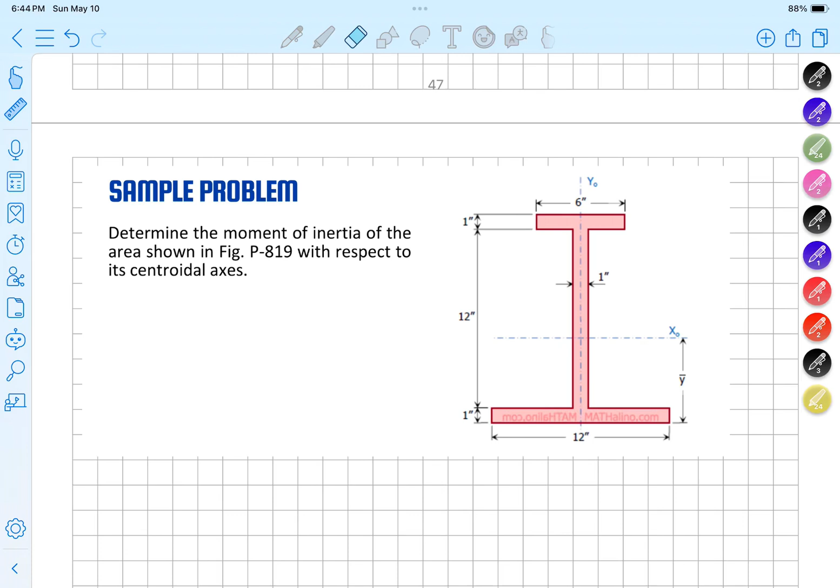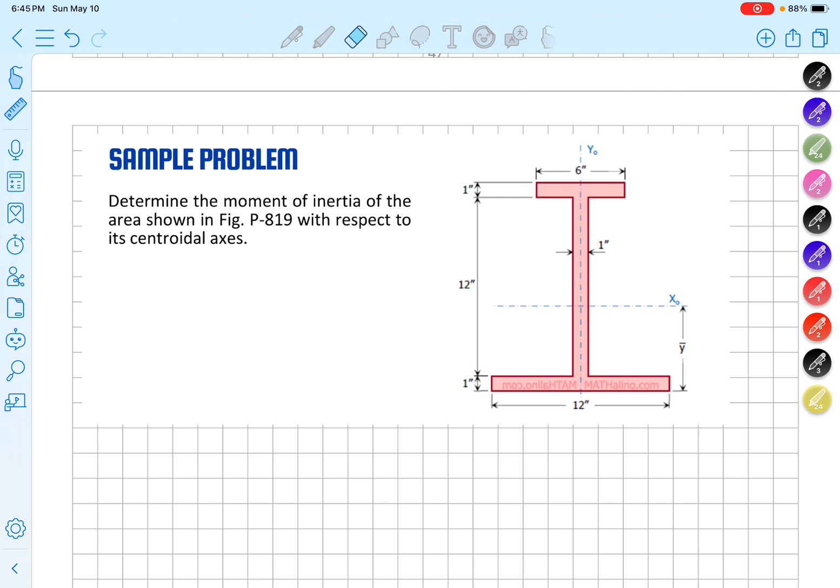Okay guys, nagbabalik tayo for sample problem number 2 under the moment of inertia. Determine the moment of inertia of the area shown in the figure with respect to the centroidal axis.

Okay guys, so in this case, wala tayong binigay na reference axis para ma-identify natin yung location ng centroid. So technically, pwede tayong mag-assume dyan. Lagay na lang natin dito sa gilid, at dito sa pinakababa, yung ating x and y axis. Pagpalagay natin na nandyan.

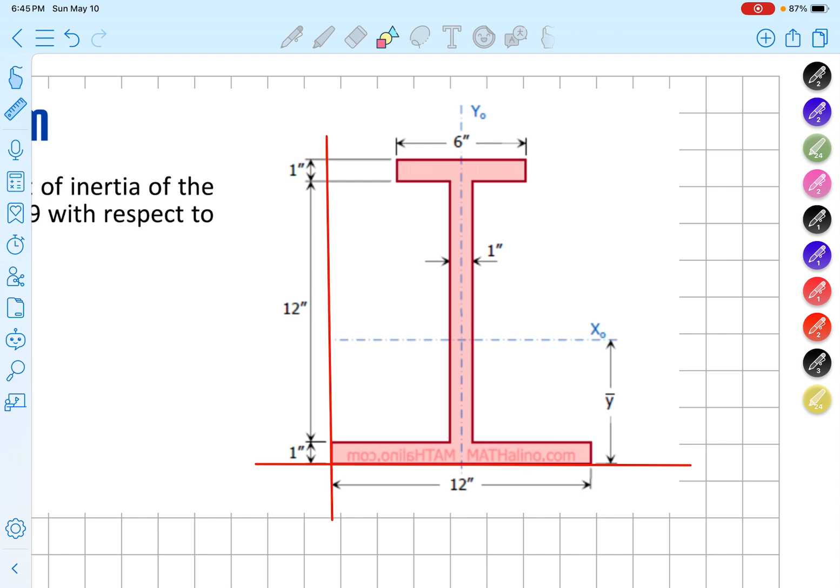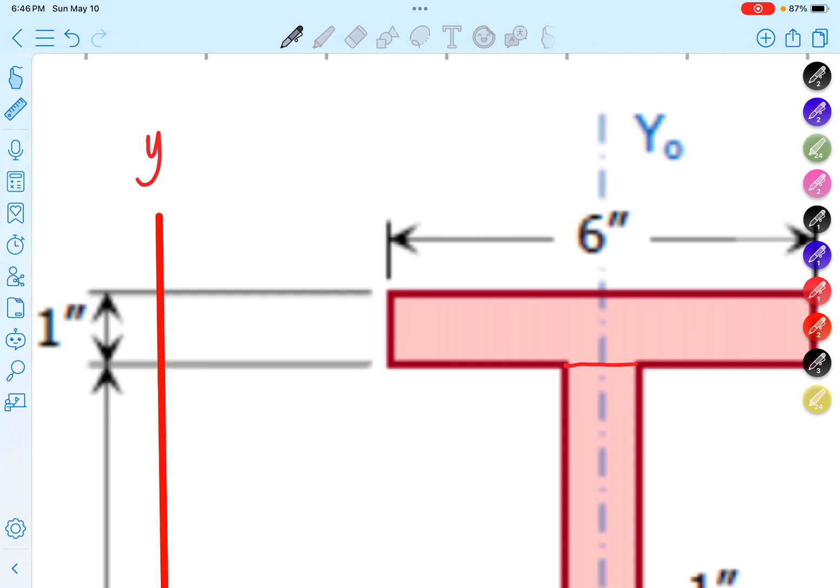Okay, so technically pwede nating hatiin yung area natin into 3. Pwede nating hatiin ito diyan, tapos hatiin natin ito. So bali tatlo lang yung area natin ngayon. By the way, this is our reference y, this is our reference x. So therefore we have shape 1, shape 2, at shape 3. Pangalanan natin sila as shape 1, shape 2, at shape 3.

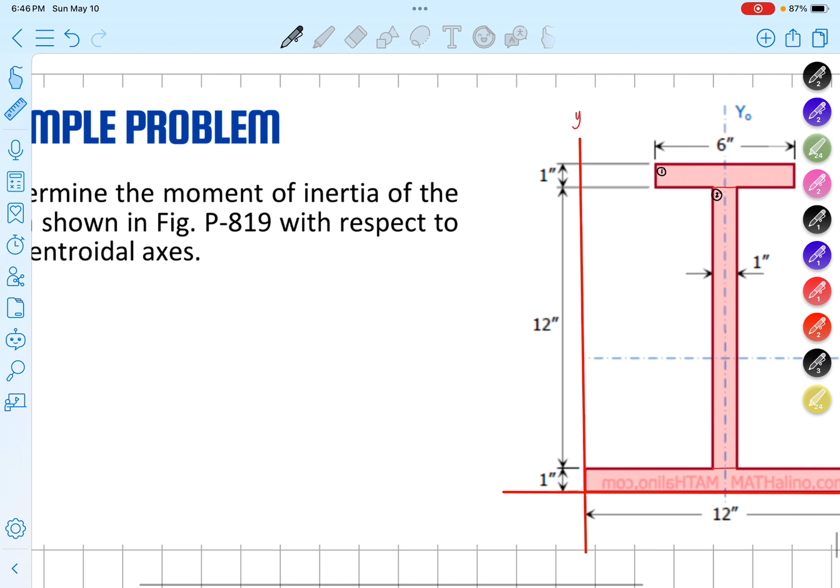Okay, so kunin lang natin ngayon yung area. Medyo madali lang ito kasi puro rectangular cross section. For area 1, ang area na kukunin natin is yung area na yan, which is 6 times 1, or 6 na lang.

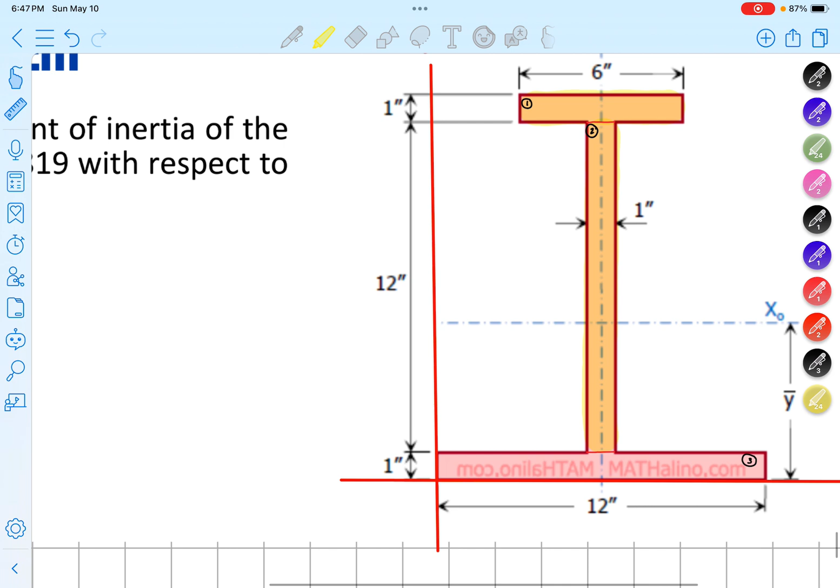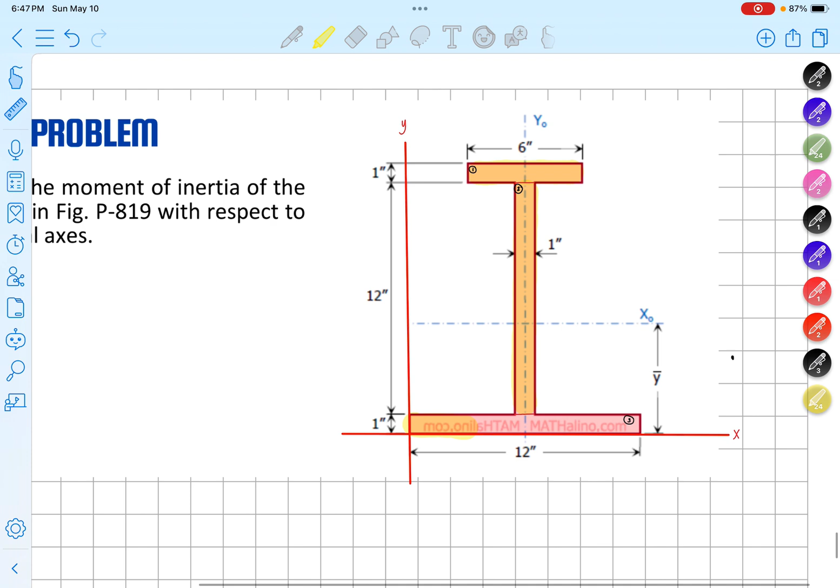Okay, now for area 2, yung length dito is 12, at may thickness na 1. So technically that's 12 times 1, so 12 na lang. At then for the last one, ito naman ay may area na kukumputin din natin - that's also 12 times 1, so 12 lang din. Okay, ang next na kailangan natin gawin is to determine ang xi muna.

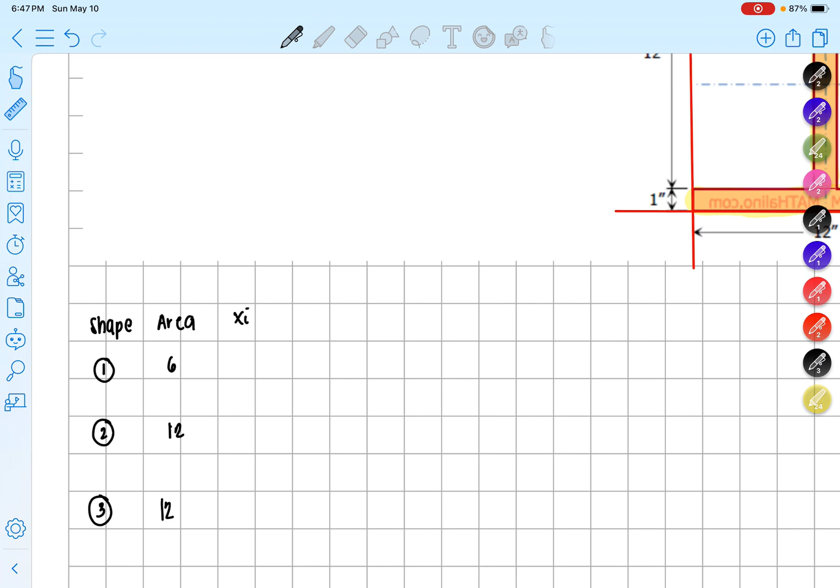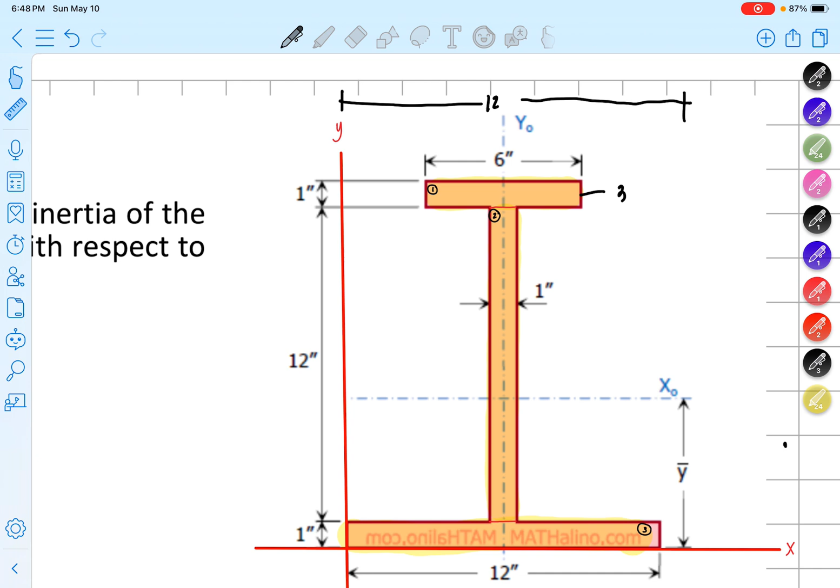Sige, sa xi muna tayo. Xi, positive kapag nasa kanan ng y, negative kapag nasa kaliwa ng y. Kung meron tayong 6 dito sa gitna at 12 itong buo na to, tapatan natin yan, magkakaroon ka ng 3 dito, tapos 3 din dito, kasi 3 plus 6 is 9 plus 3 equal to 12. Ibig sabihin malolocate na natin yung distance neto from the y-axis, which is 3 plus kalahati ng 6, so 3 plus 3 is equal to 6.

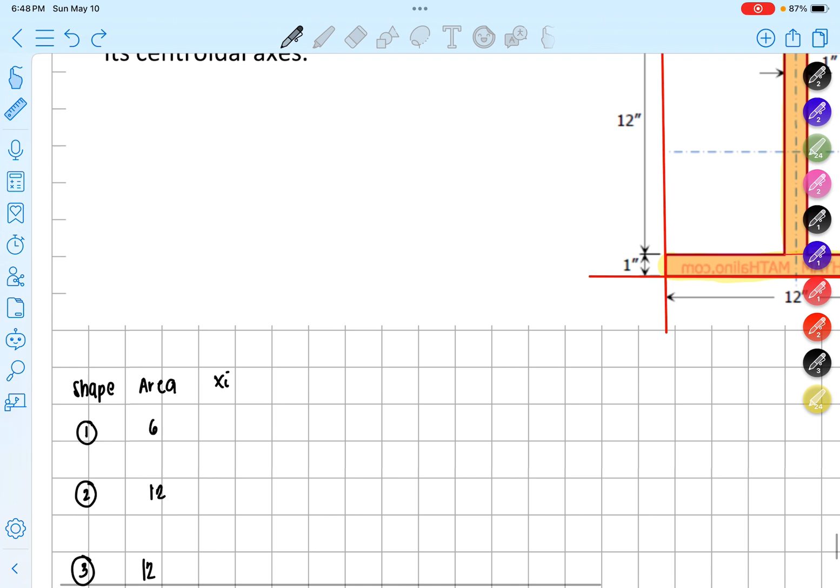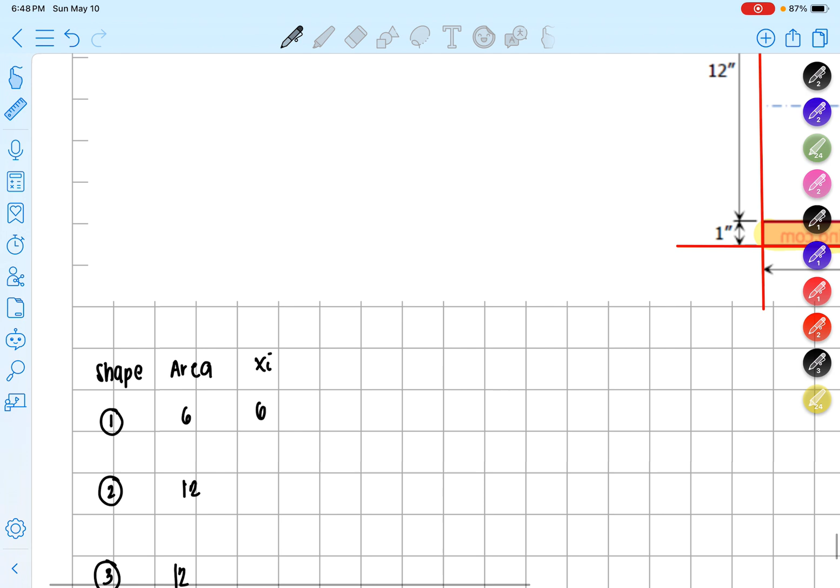Next for this one naman, eto sa gitna natin na yan, nasa 6 lang din siya from y. So technically this is also 6. Next yung 12, nasa gitna lang din to, yung 12 na may 12 the base, nandyan lang din sa gitna. So technically from y-axis, that's also 6.

Okay, so next we have AXI. Pag multiply lang natin, 6 times 6 equal to 36. 6 times 12 equal to 72, and dalawang 72. Mamaya natin i-total. Kunin muna natin si yi.

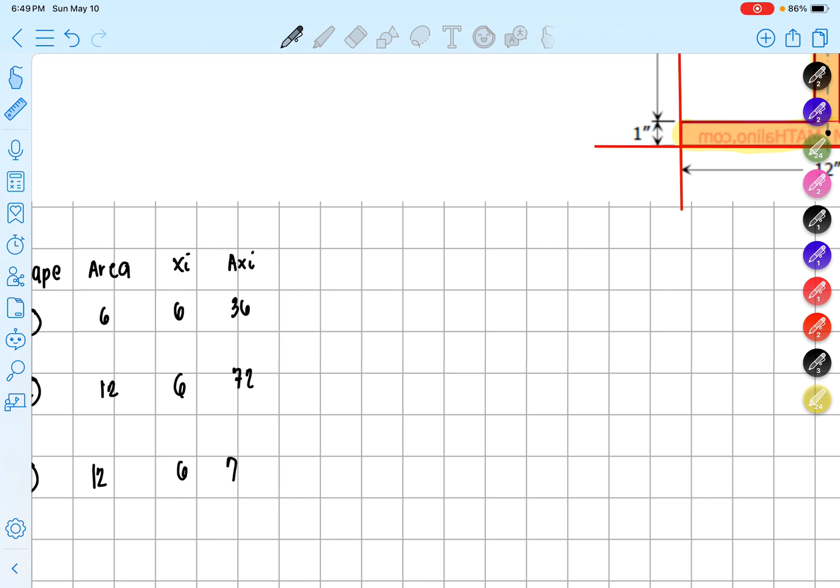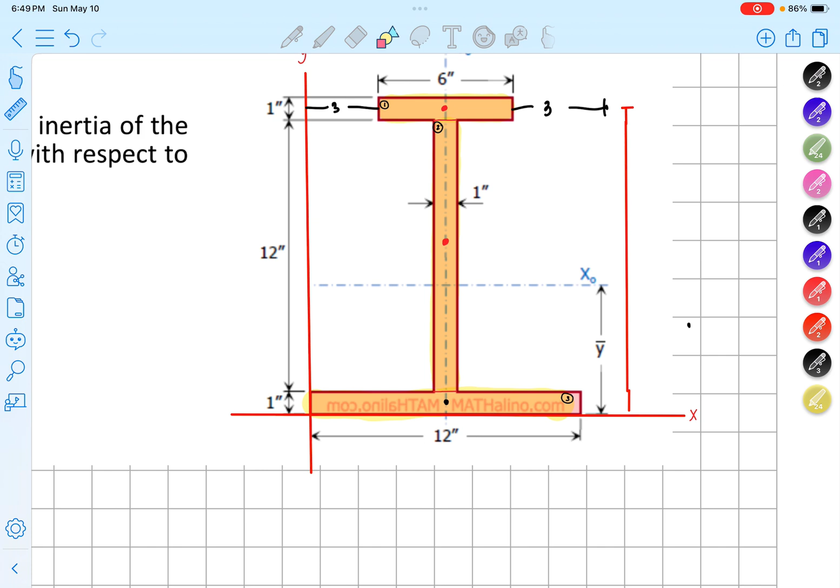Ngayon si yi, naka-reference tayo dito sa reference x-axis natin. Ibig sabihin, dyan tayo magsisimulang bumilang. Halimbawa, etong portion na to, bibilangan natin hanggang dito sa reference x natin - 1, tapos paplasan natin ng 12, tapos kalahati nito. So technically that's 1 plus 12 plus kalahati ng 1 para sa area 1. 1 plus 12 is 13, tapos kalahati ng 1, so this is 13.5 - yan yung vertical distance niya from the x-axis.

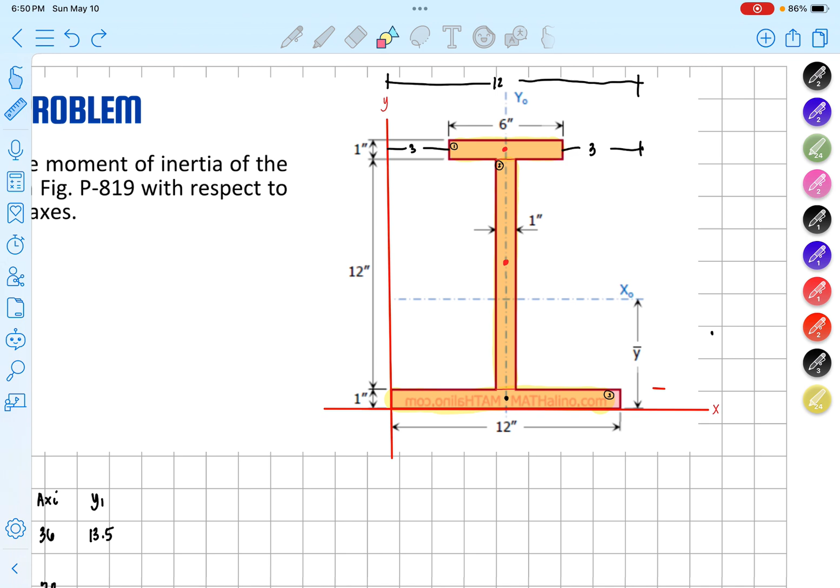Next naman, para sa area 2, kung mula dito hahanapin natin yan, that's 1 plus kalahati naman ng 12. Ibig sabihin, 1 ka muna dyan, tapos kalahati ka lang ng 12, so that's 1 plus 6 equal to 7. At then para sa last one, etong isa na to, kung mula dito lang yung kukumputin natin, hanggang dyan, kalahati lang ng 1 yan, so technically that's 0.5.

Okay, this is 0.5. Let's take AYI now. So 6 times 13.5 equals 81. Next, 12 times 7 equals 84. And 12 times 0.5 equals 6, of course.

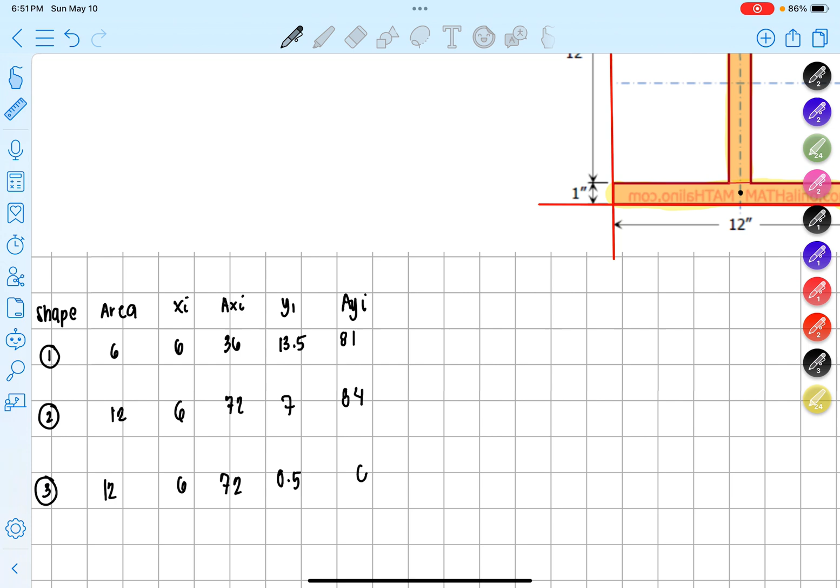Now let's get the total area. For the total area, we have 6 plus 12 plus 12, equal to 30. And for AXI, the sum is 36 plus 72 plus 72.

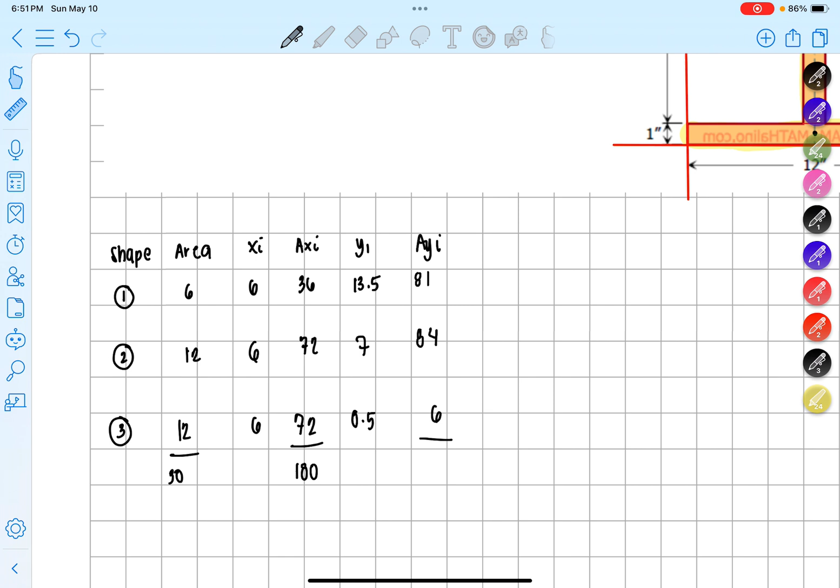This equals 180. And for AYI, we have 81 plus 84 plus 6, giving us 171. So in this case, is that correct? 30, right? Yes, 30.

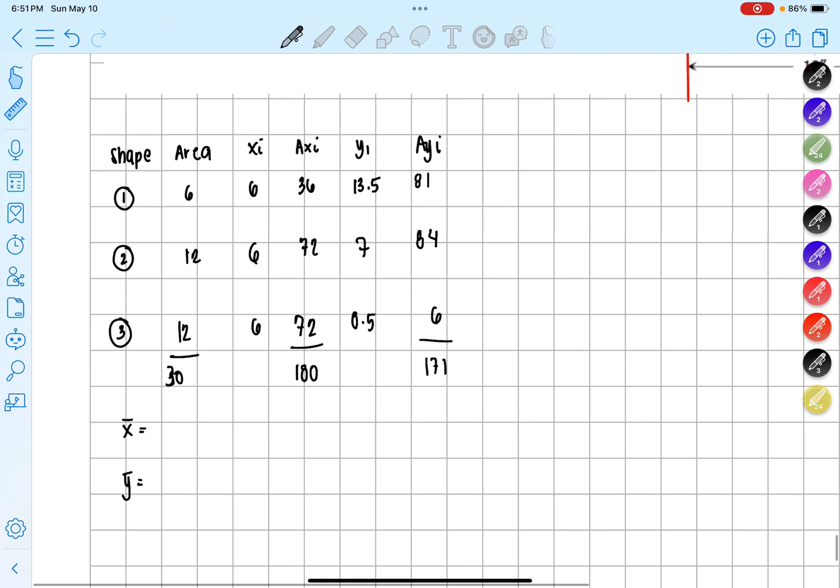So that means we can get X bar and Y bar. For X bar, this is simply equal to AXI over the total area. AYI over the total area gives us Y bar. So our X bar is simply equal to 180 over 30, which equals 180 divided by 30, equal to 6.

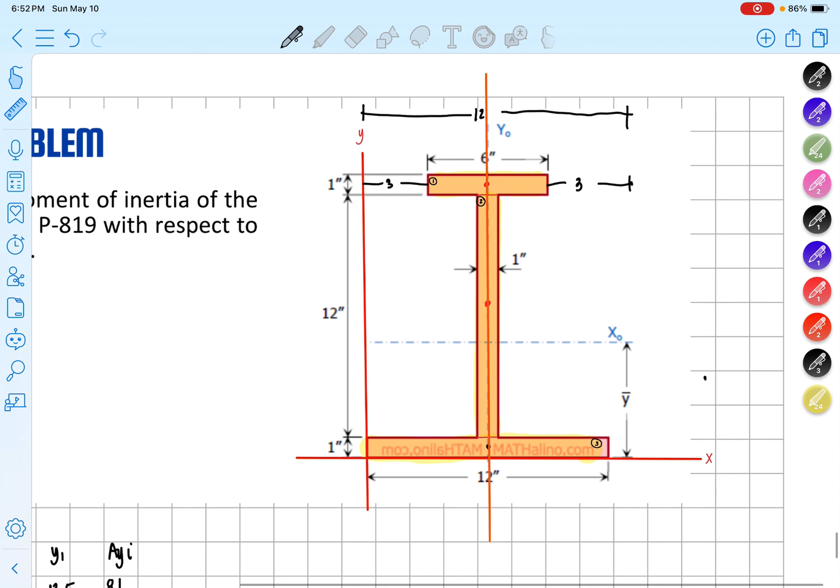For Y bar, this is equal to 171 over 30. So this equals 171 divided by 30, which equals 5.7.

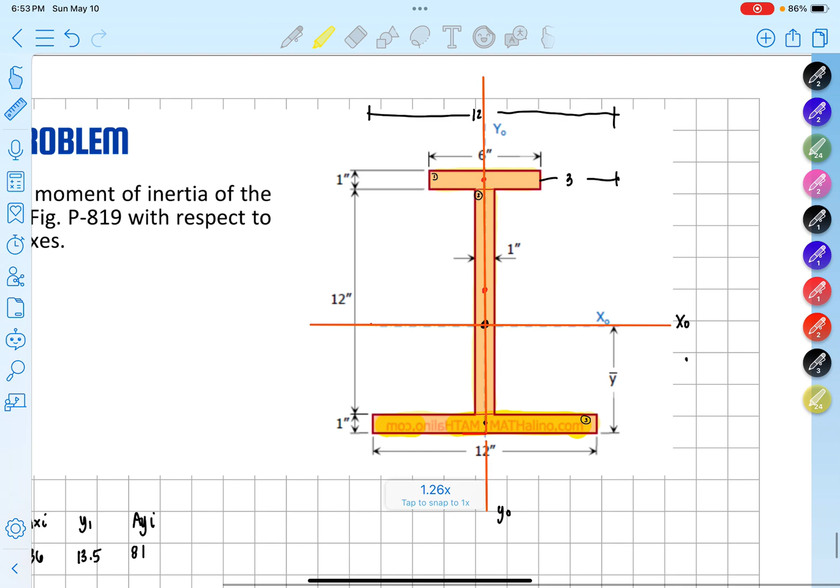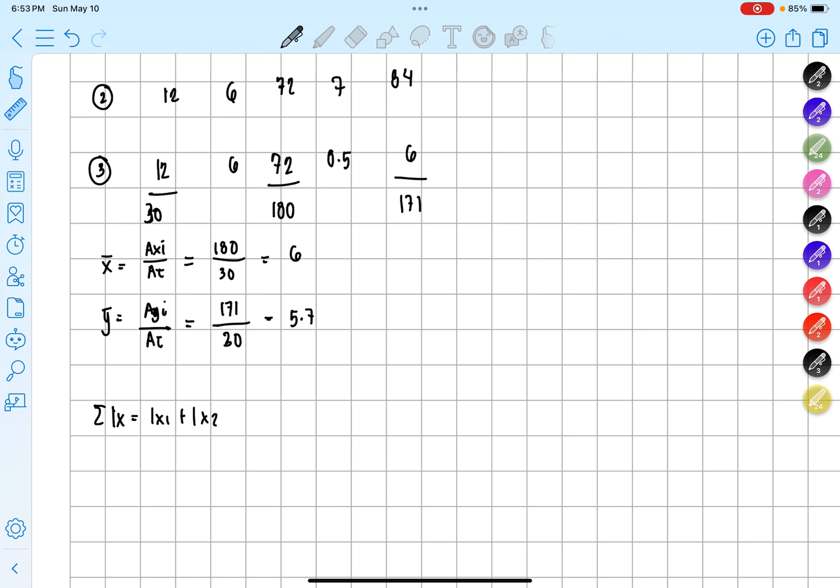Now, what we'll do is get the IX and IY. Our IX, right, the summation of IX equals IX1 plus IX2 plus IX3, correct? And for IX, always remember that IX equals IXO, the individual moment of inertia, plus the area times y bar minus yi squared.

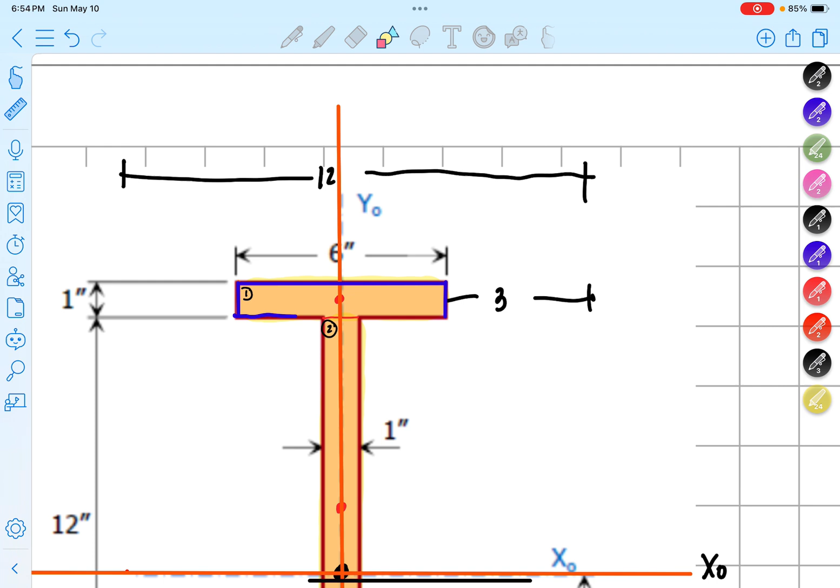Right? When we get the moment of inertia of a rectangle, IX, that's BH cubed over 12. So the base is 6, the height is 1, over 12. And again, looking at our table, the area is 6.

That's right. So, plus area of 6 multiplied by y bar, which is 5.7. So technically that's 5.7 minus yn, which is 13.5. So minus 13.5 squared. That equals, okay, so we have 6, 1 cubed, over 12 plus 6 times 5.7 minus 13.5 squared.

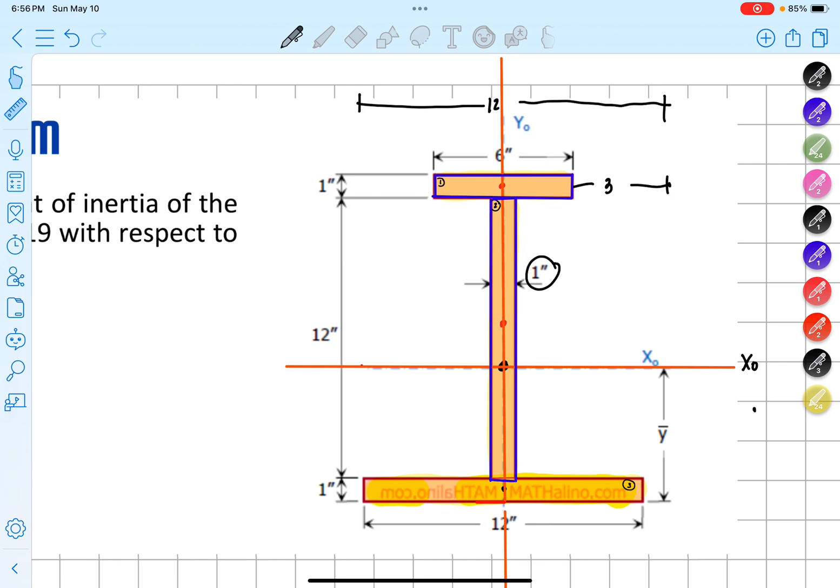Since it's vertical, we use BH cubed over 12. So that's base 1, height 12 cubed over 12, plus, what's the area for that? Looking at the table, we have 12 for that area. So we have 12. What's the yn for that? Our yn for that is 7.

So that's technically y bar, 5.7, minus our yn of 7, squared. So this equals 1 times 12 cubed over 12, plus 12 times 5.7 minus 7 squared, which equals 164.28.

Inches raised to the 4th power. And now we're down to the last one. So we have IX3. For IX3, what we're dealing with now is this.

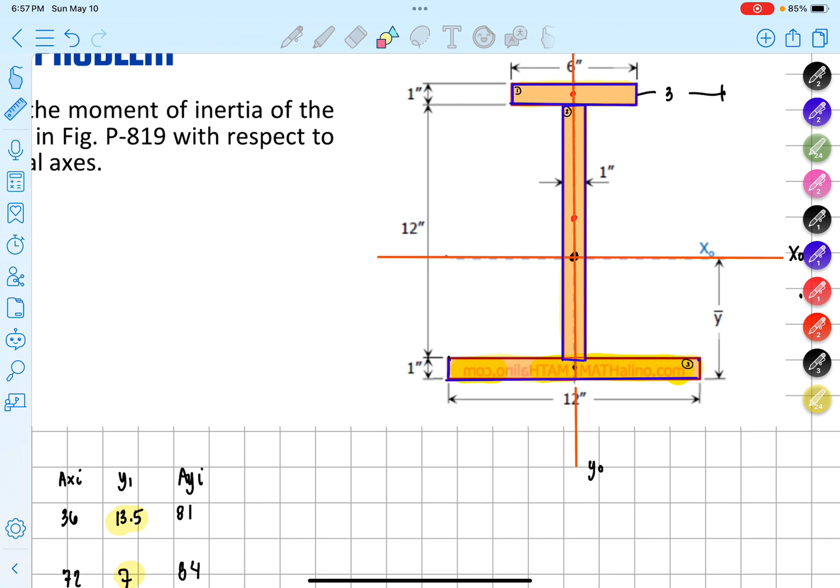Okay, ito naman pinag-uusapan natin ngayon, ang last one. Ang base natin ay 12, ang height niya ay 1. So technically, BH cube over 12, 12 times 1 cube over 12 naman tayo. So this is equal to 12, 1 cube over 12, plus, tingin sa table, ang area niyan ay 12.

Plus 12, y bar natin na 5.7 minus yn. Ang yn nun guys ay basically 0.5. Tama ba? Oo, 0.5. So this squared is equal to 0.5.

So ngayon, meron tayong 12 multiply by 1 cube over 12 plus the area na 12, times 5.7 minus 0.5 square. So this is equal to 325.48 inches raised to 4.

Technically, ayan na tayo guys. Pagka-plus-plusin lang natin yan, we have 365.54 plus 164.28 plus 325.48. So this is equal to 855.3 inches raised to 4.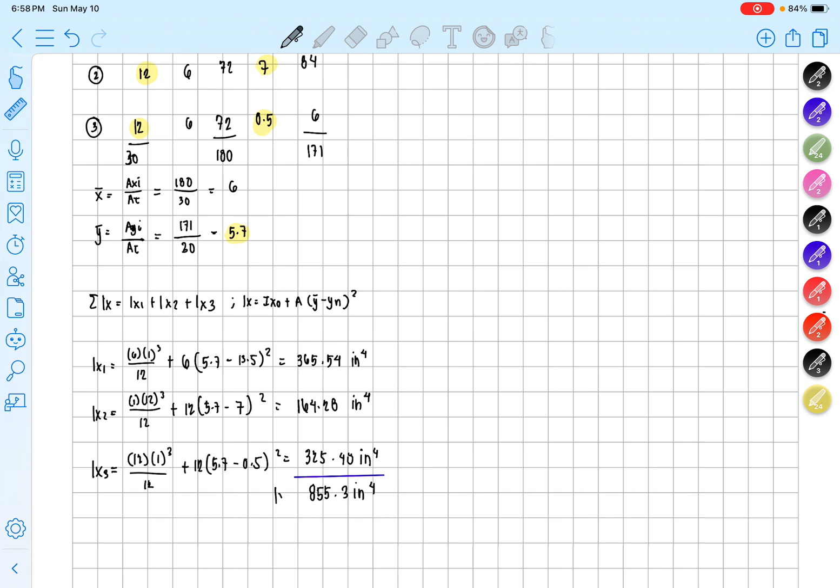So this is equal to IX. Ayan na ngayon ang final answer natin for IX. Ganun lang kasimple. Ngayon guys, for IY naman, hatiin ko lang ito.

Always remember that the summation of IY ay simply equal to IY1 plus IY2 plus IY3. And always remember na ang IY ay simply equal to IYO, o ang individual moment of inertia for each shape, plus area times x bar minus xn square.

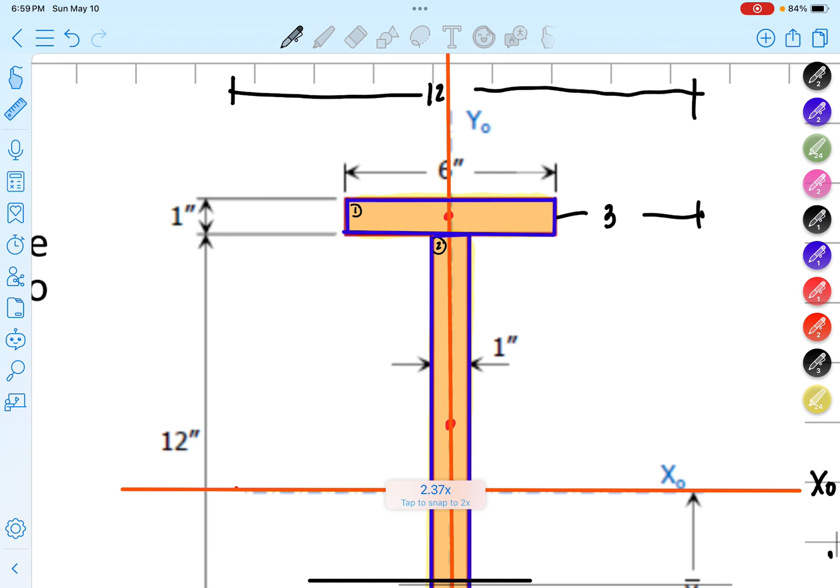So sa case na ito guys, para sa ating IY1, kung titingnan niyo mabuti, eto naman ulit tayo. Pero ngayon, IY ang kino-compute natin. So ibig sabihin, ang kailangan naman natin diyan, ito munang area natin kino-consider natin ulit.

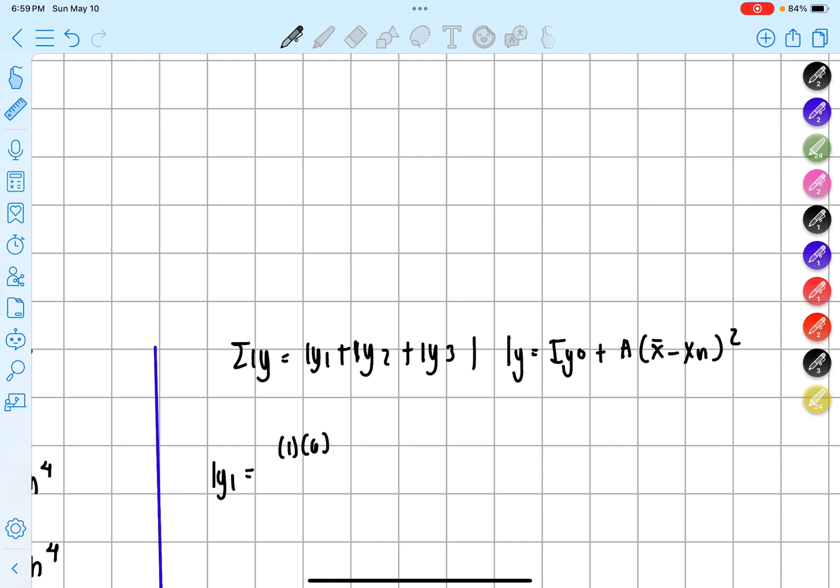Pero sa case na ito, IY naman ang hinahanap natin. So technically, magbabaligtad yun, iyon ay HB cube over 12. So ang height natin ay 1, kaya 1, 6 cube over 12 plus, ano ang area natin? Tingnan sa area, 6 pa rin tayo sa area, so plus 6. Kaso ito na, kung titingnan niyo mabuti, yung x bar niya, teka, palitan natin ng color.

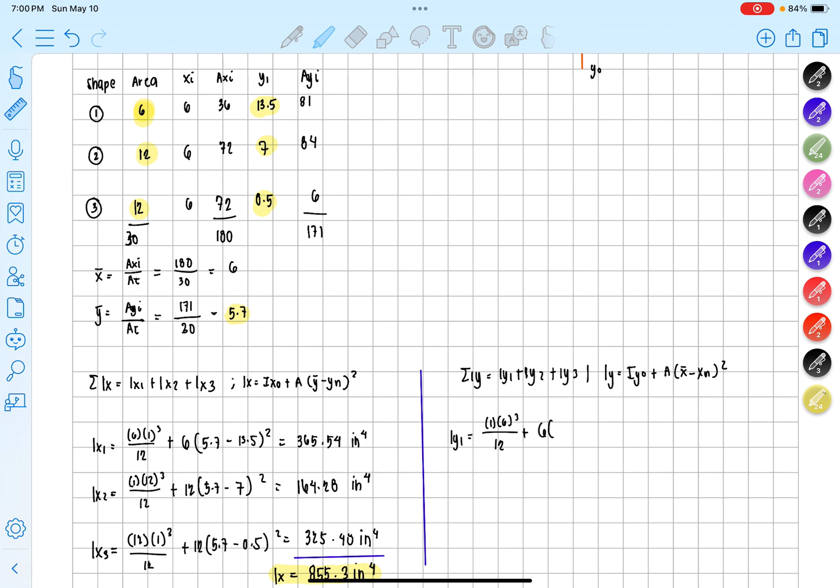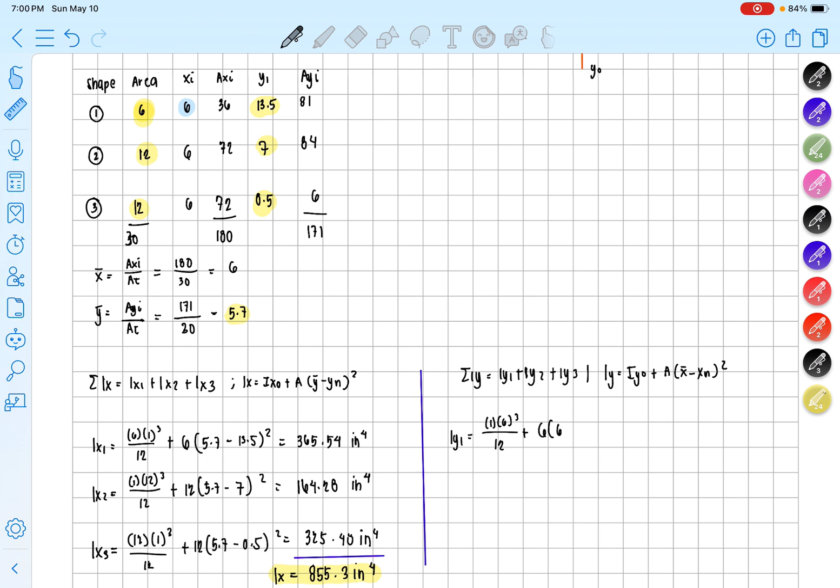Kung titingnan niyo mabuti, ito na lang. Yung xi niya ay 6. Yung x bar natin ay 6. Tapos yung xi niya ay 6 din, squared. So technically, this is 0, makakawala na yung term na yan. So ibig sabihin, ang makukuha na natin diyan ay 1, 6 cube over 12, that's equal to 18.

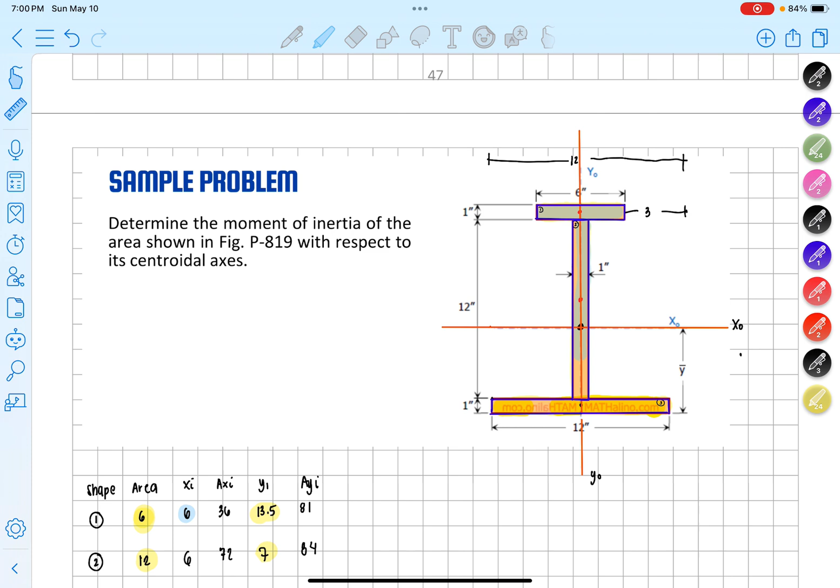Para sa Iy2 naman, ganun lang din, mabaligtad lang din. Ito naman tayo, itong shape na ito, HB cube over 12 naman tayo diyan. Height naman diyan ay 12, ang base ay 1. So ibig sabihin, 12, 1 cube over 12.

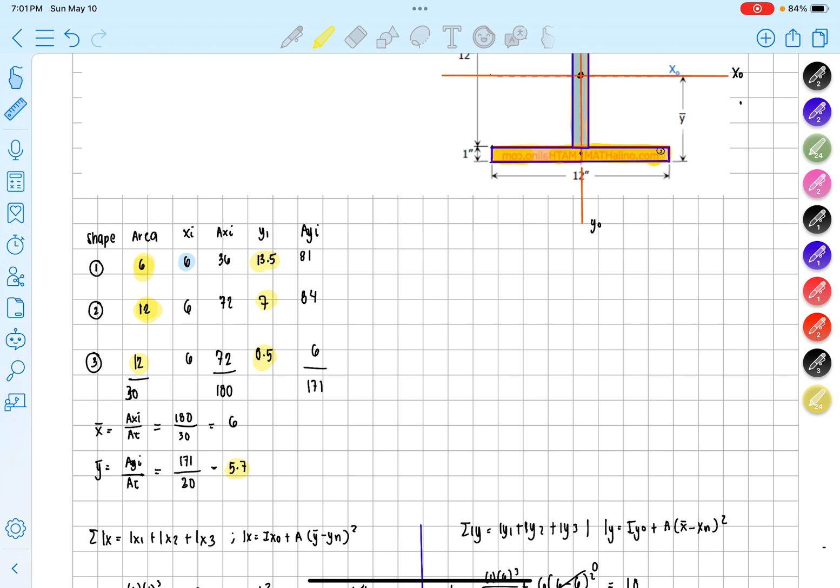Plus, ano ang area po niyan? Ang area niyan ay still 12 pa rin. Uulitin natin, ang x bar natin ay 6. Ay teka, area niya ay 12, wait lang. Parang ganoon na naman ang mangyayari.

So meron tayong area na 12. Yung x bar niya ay 6, yung xn niya ay 6 lang din, squared, so magsi-0 lang din yan. Ngayon, ayun na lang sa atin. We have 12, actually this is equal to 1, kasi 1 cube is 1 times 12 is 12, 12 divided by 12 is equal to 1.

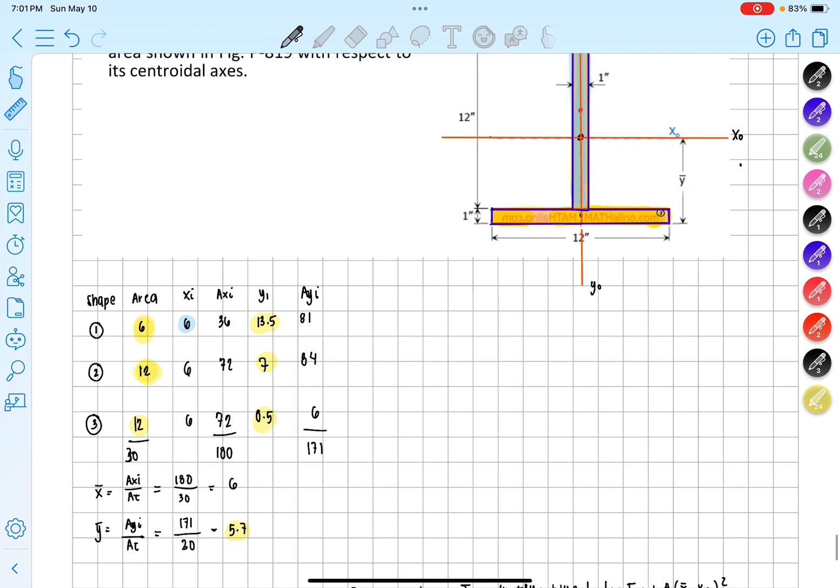Okay, for Iy3, this is equal to, ang height naman niya dito ay 1, ang base niya ay 12. So HB cube tayo, so 1, base cube na 12, over 12, plus ang area niya ay 12 pa rin, okay?

Ito yung kanina. Ngayon, yung x bar niya ay 6, 6 na naman ito, so makaka-cancel na naman. So technically, that's 12, 6 minus 6 square is 0. That's equal to, ito hindi na 12, ano yan? 1, 12 cube over 12, that's equal to 144.

So ibig sabihin, pagka-plus-plusin na natin yan, we have 18 plus 1 plus 144. This is simply equal to 163. So that's our Iy, inches raised to 4.

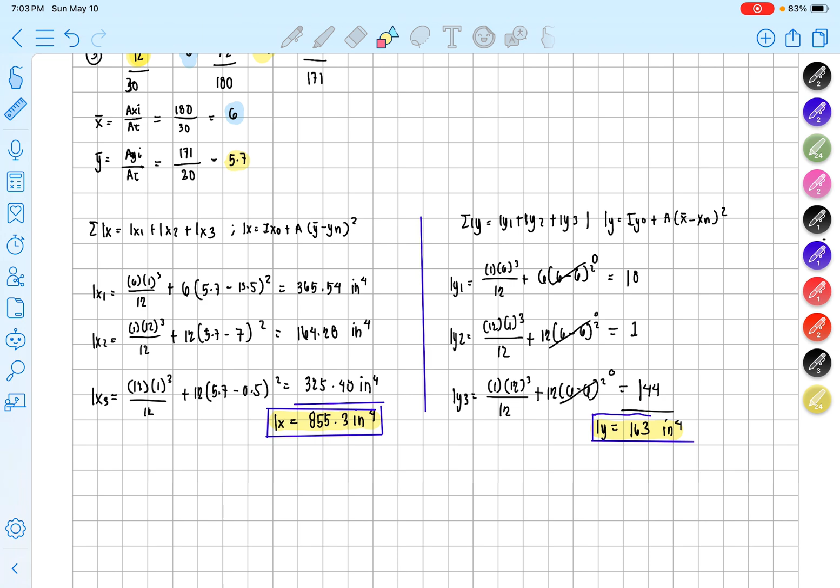So yan na guys ang sagot natin for this problem. Paki-browse lang itong first two problems natin, at kapag ka-elaborate na natin, magdadagdag pa ako ng sample problem. So yun lang, that's for moment of inertia.